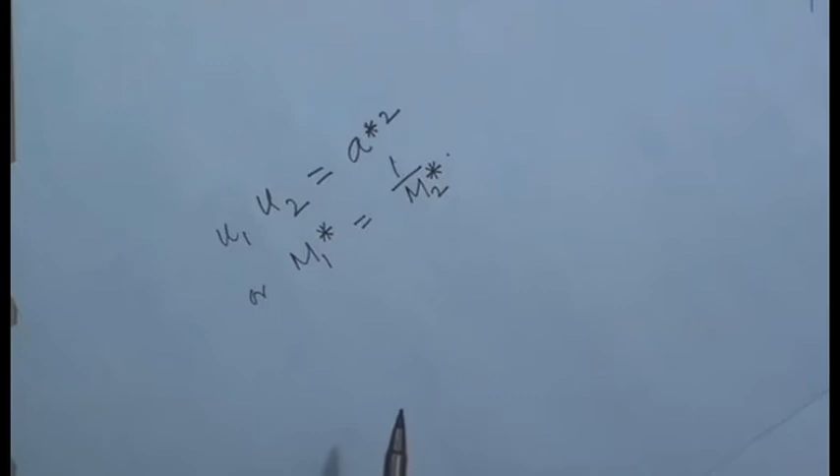So, continuing our discussion on flow through a uniform duct, we have seen that the flow velocity at the two stations 1 and 2 satisfies the relationship u1 u2 = a star square, which can be written as M1 star equal to 1 by M2 star. The speed ratio at the two stations satisfies this reciprocal relationship, which clearly shows that if M1 star is greater than 1, then M2 star will be less than 1, and if M1 star is less than 1, M2 star will be greater than 1, and vice versa.

We have already seen that M1 star becomes less than 1 when the flow is subsonic, that is when M1 is less than 1. So, what we can see from here is that when the flow is subsonic at station 1, the flow is likely to be supersonic at station 2, and similarly, if the flow is supersonic at station 1, it will be subsonic at station 2. However, there is nothing in this relation that excludes one of these possibilities.

However, as we have mentioned, based on physical grounds, if there is some sort of non-equilibrium region between station 1 and station 2, where viscous effects or heat transfer are present, then through these dissipative processes, accelerating flow is physically not possible, and the jump from subsonic to supersonic most probably will not occur in a real flow. We will later show using the second law of thermodynamics that the deceleration from supersonic to subsonic flow is physically possible. However, the alternative subsonic to supersonic acceleration through this jump will not be possible.

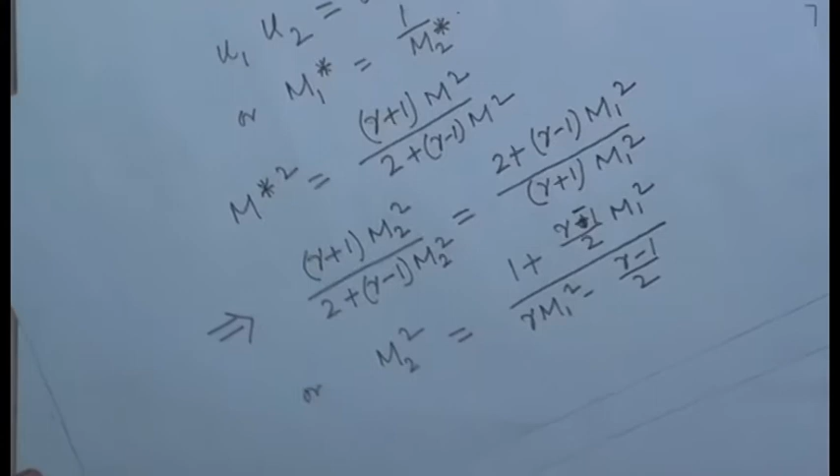Which can be written in the form M2 square equals 1 plus gamma minus 1 by 2 M1 square by gamma M1 square minus gamma minus 1 by 2. That is, the Mach number at station 2 is simply a function of the Mach number at station 1 and, of course, the properties of the gas. That is, we can write that M2 is simply a function of Mach number and gamma. You can see here that if M1 is 1, then M2 is also 1.

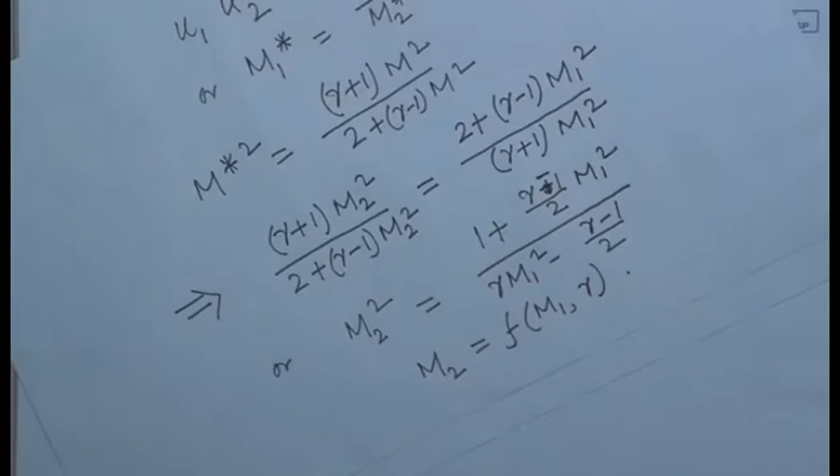However, if M1 is greater than 1, this shows, if M1 equals 1, then M2 is also 1. If M1 is greater than 1, then M2 is less than 1, and similarly, if M1 is less than 1, M2 is greater than 1, which of course we will see later on will not be possible.

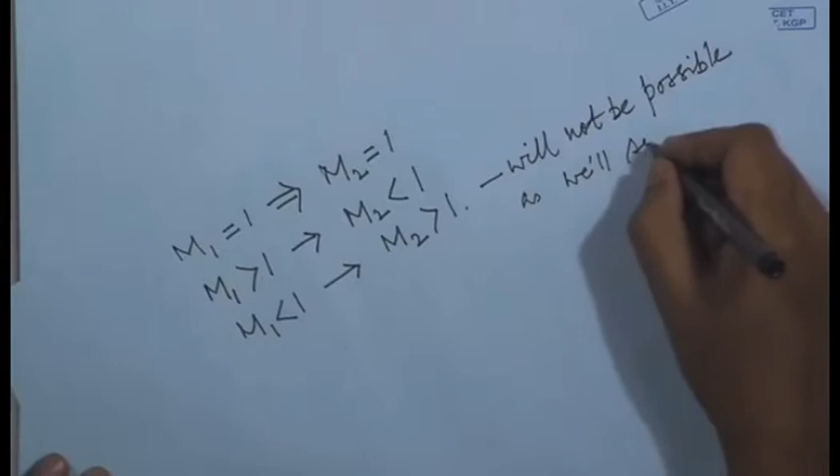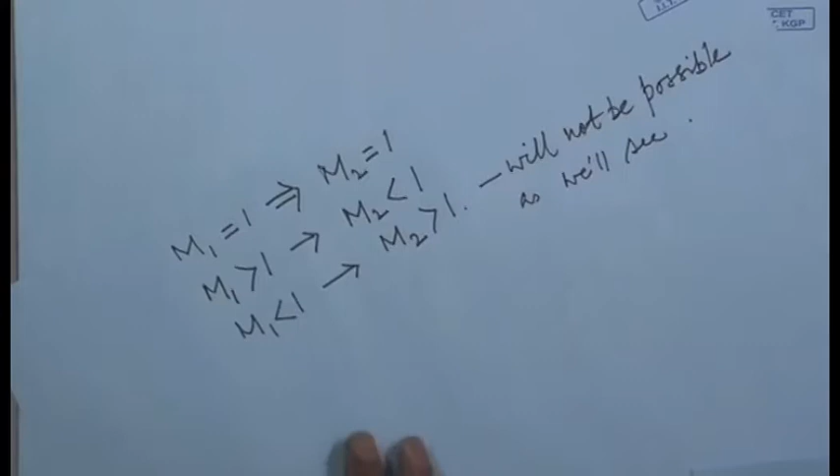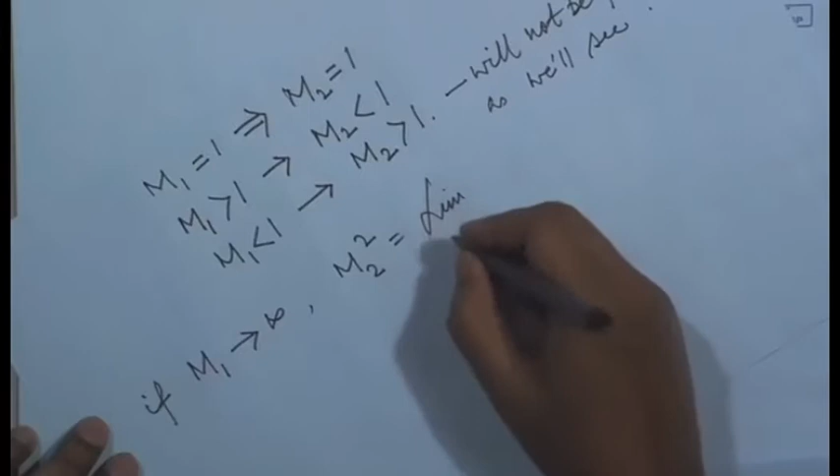Further, we see that as M1 approaches infinity, a very large value, then M2 square approaches gamma minus 1 by 2 gamma, and thus M2 reaches 0.378 if gamma is 1.4.

The velocity ratio between station 1 and station 2 can also similarly be obtained as u1 by u2 equals u1 square by u1 u2, that is u1 square by a star square.

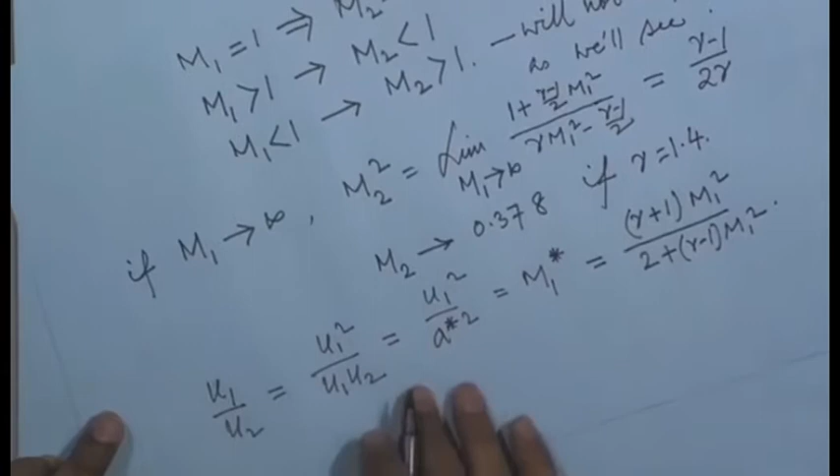Using the continuity equation for the present problem, we can also see that rho 2 by rho 1 is u1 by u2, and again can be written as gamma plus 1 M1 square by 2 plus gamma minus 1 M1 square.

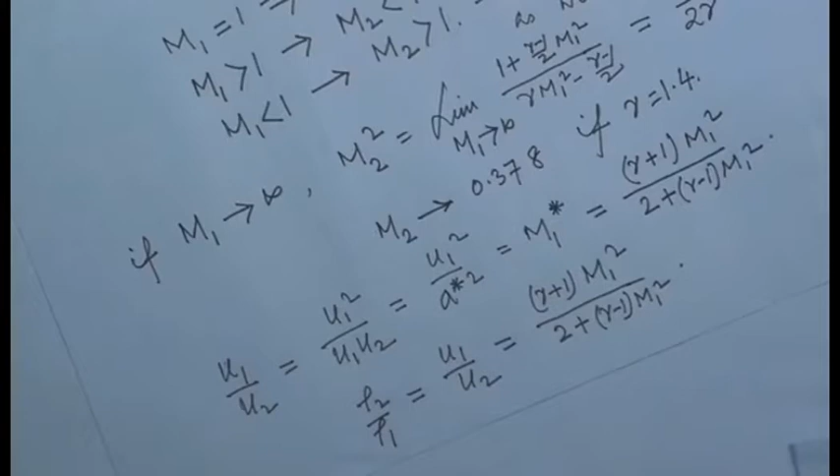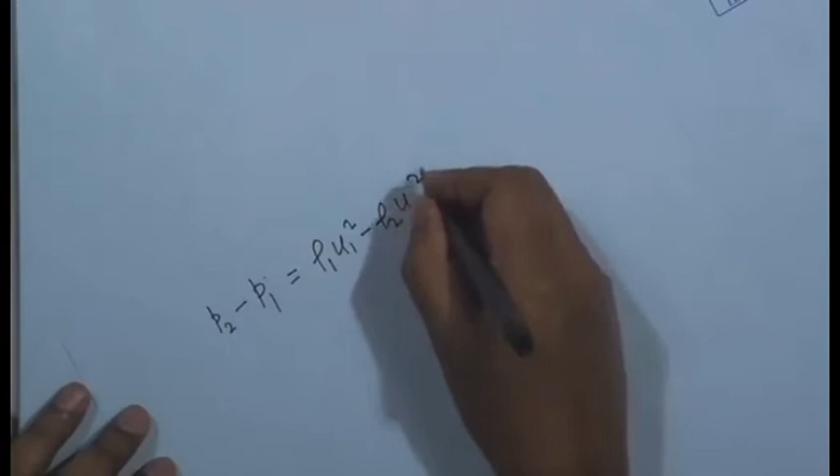The pressure difference between these two stations can be obtained from the momentum equation written in the form P2 minus P1 equal to rho 1 u1 square minus rho 2 u2 square, which can be written as rho 1 u1 into u1 minus u2, where rho 2 u2 is equal to rho 1 u1. That is, since rho 2 u2 square is rho 2 u2 into u2, which is rho 1 u1 u2.

Hence, we get the pressure rise P2 minus P1 by P1 as rho 1 u1 square by P1 into 1 minus u2 by u1. Then, using the isentropic relation for P1 by rho 1, we can write this to be 2 gamma by gamma plus 1.

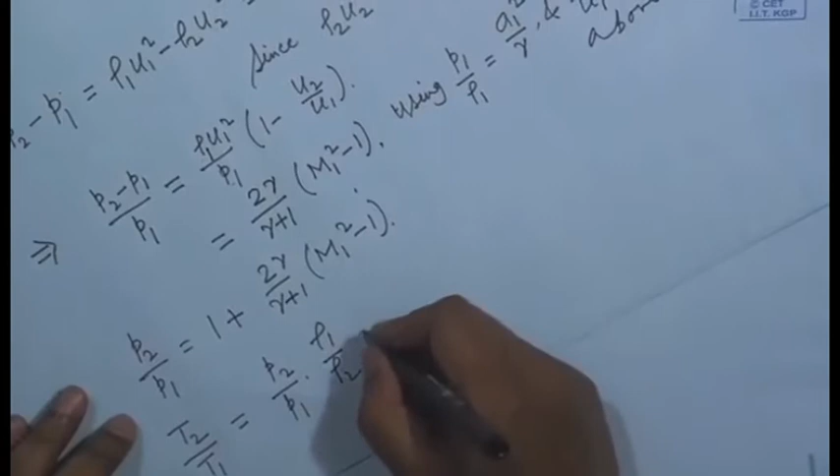The ratio delta P, or P2 minus P1 by P1, is often referred to as the shock strength. The temperature ratio can be obtained using the perfect gas relationship P equal to rho R T, that is P2 by P1 into rho1 by rho2, and this gives P2 by P1 is 1 plus 2 gamma by gamma plus 1 into M1 square minus 1, into rho1 by rho2,

where rho1 by rho2 is 2 plus gamma minus 1 M1 square by gamma plus 1 M1 square, which can be written as 1 plus 2 into gamma minus 1 by gamma plus 1 square, into gamma M1 square plus 1 by M1 square, into M1 square minus 1.

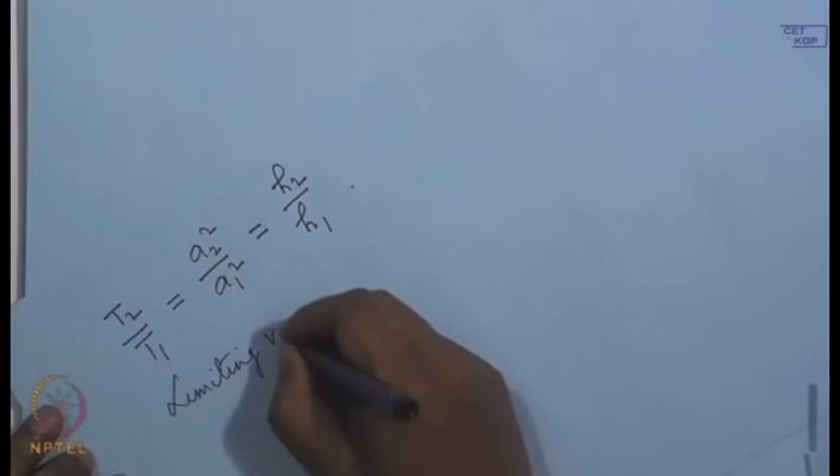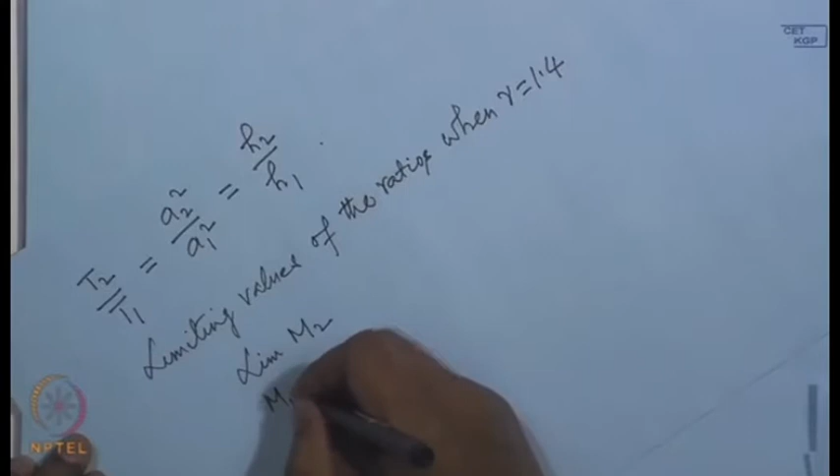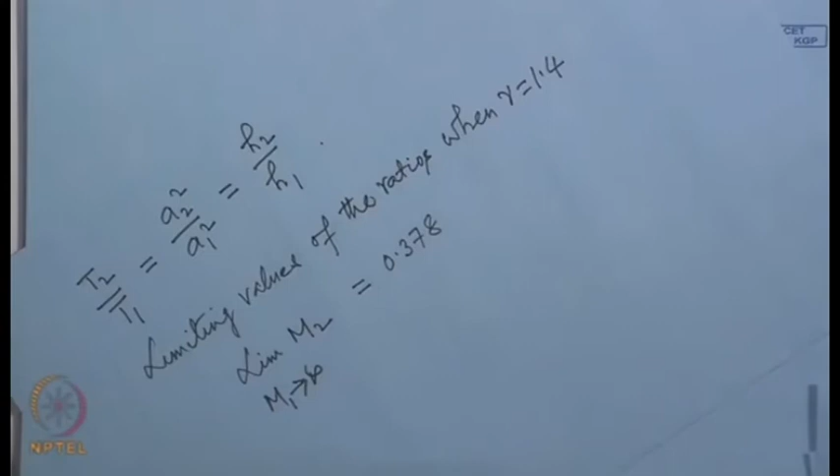Limiting values of the ratios when gamma is a fixed quantity given by 1.4, as is usually used for air. We have already seen that M2 as M1 approaches infinity is 0.378, and the density ratio becomes

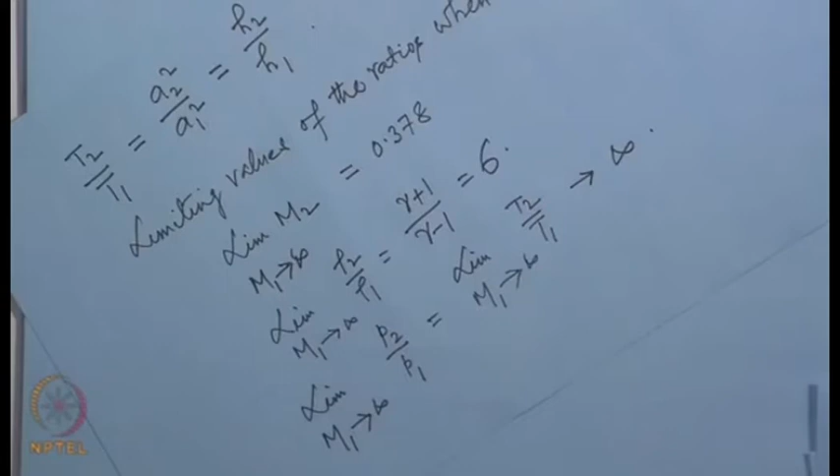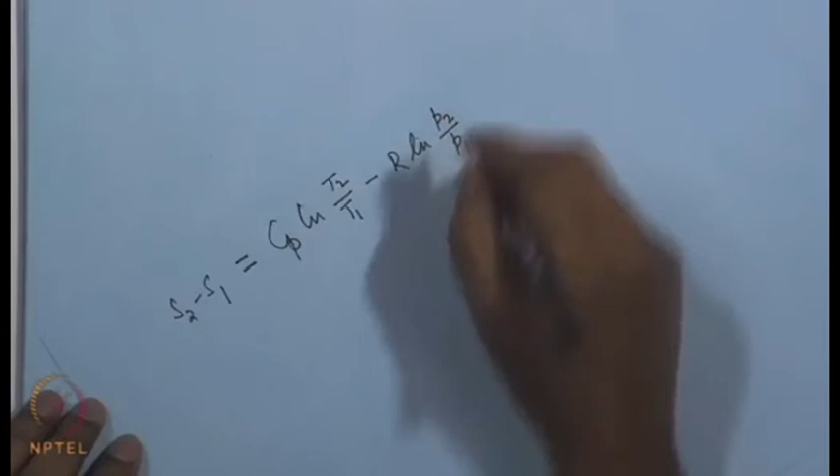Now, computing the change in entropy between the two stations, you can write S2 minus S1 is Cp log T2 by T1 minus R log P2 by P1, which can be written as R log, and substituting this pressure ratio and density ratio in this relation, we have S2 minus S1 by R equal to log, 2 gamma by gamma plus 1 M1 square minus 1

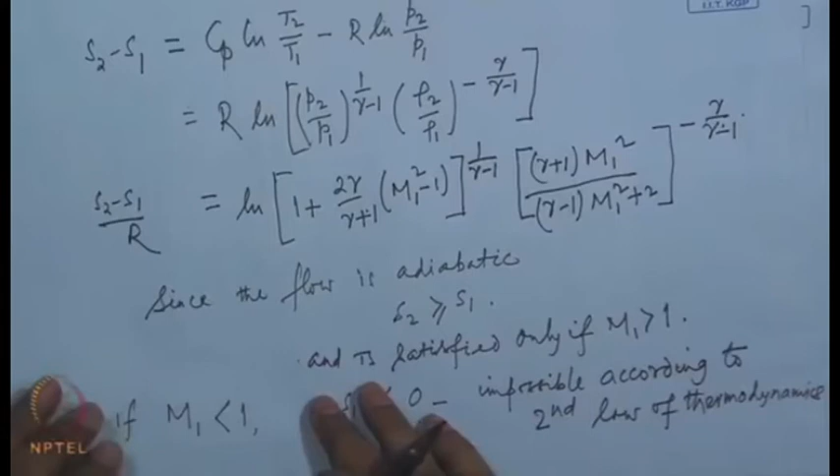A shock is called weak when the pressure rise across the shock is very small, and looking at the pressure ratio relationship, we can see that happens when M square minus 1 is small. That is, a shock is weak

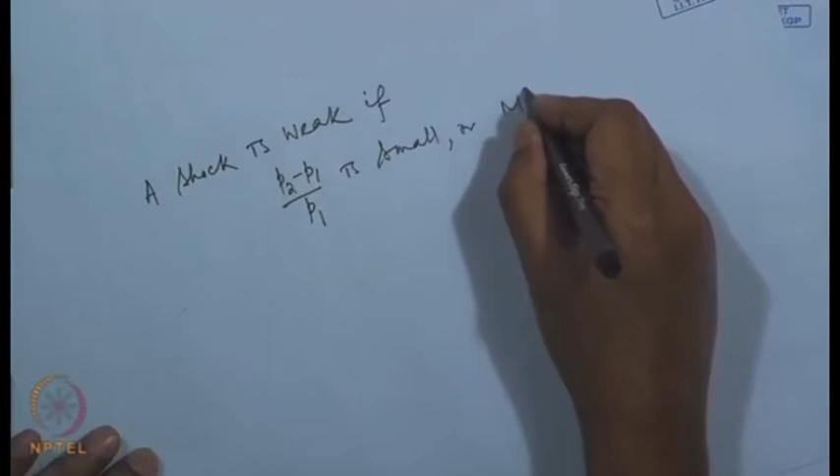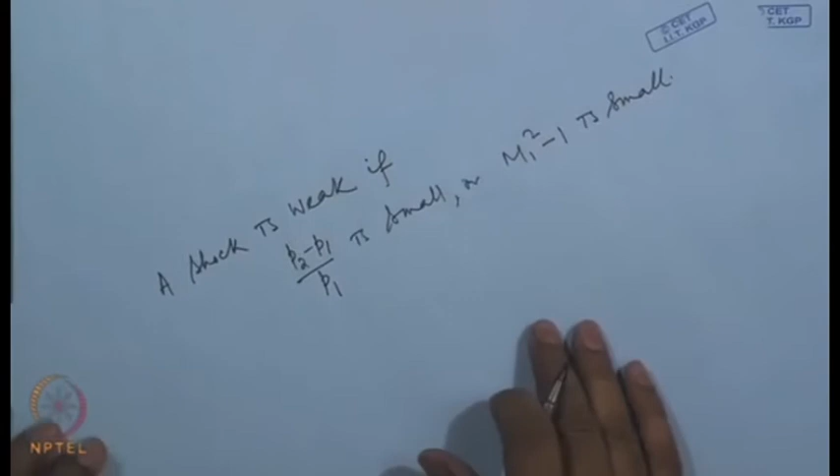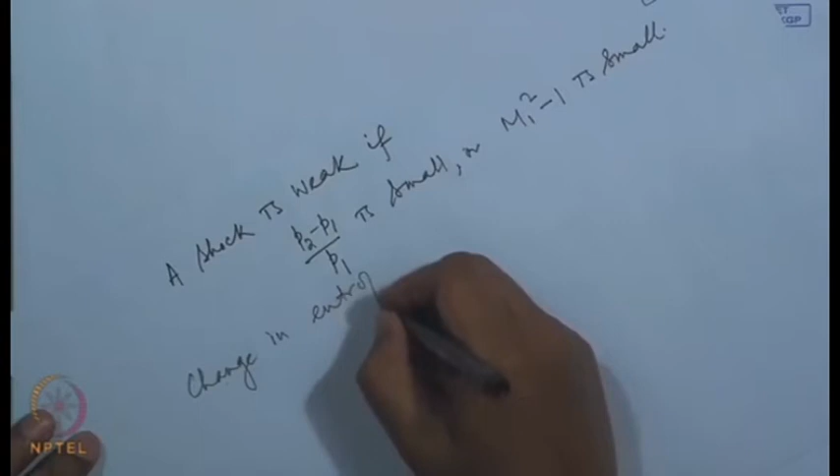and when this shock is weak, that is when M1 square minus 1 is small, the change in entropy can then be approximated, or in terms of pressure ratio, gamma plus 1 by 12 gamma square.

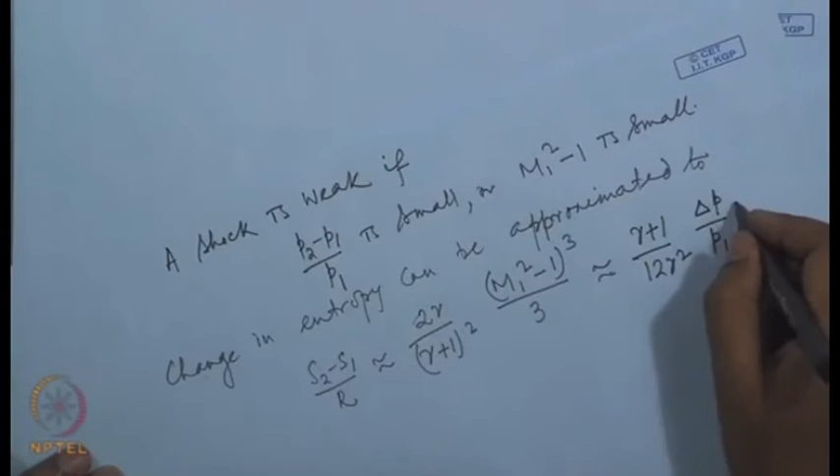So we see that for a weak shock the change in entropy is third order in shock strength. In the limit of a very weak shock, the change in entropy is almost negligible and the process is nearly isentropic. Since the flow across the shock is adiabatic, we have T02 equal to T01 as the flow is adiabatic.

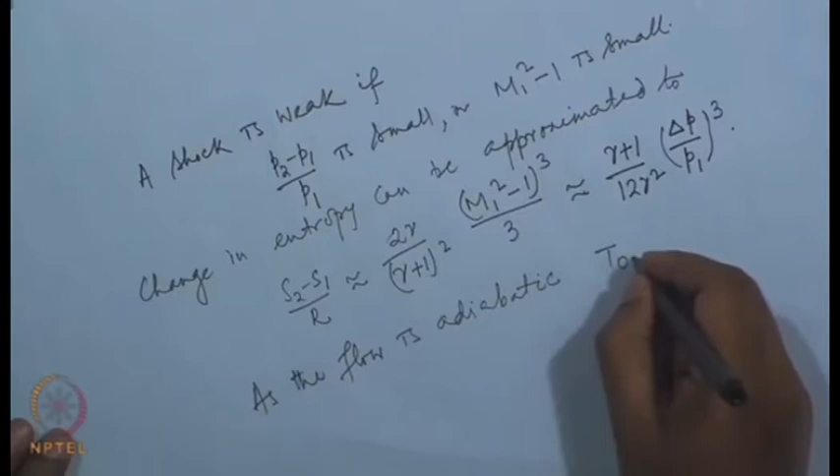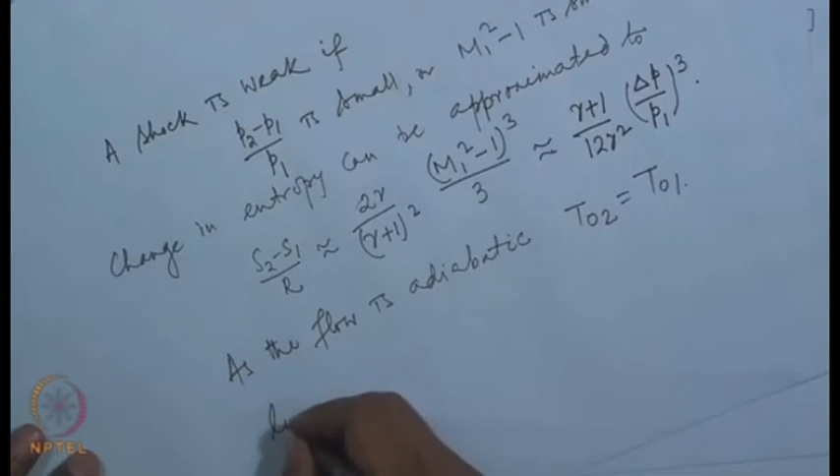T02 is T01, and the stagnation pressure ratio can be obtained in terms of the entropy difference

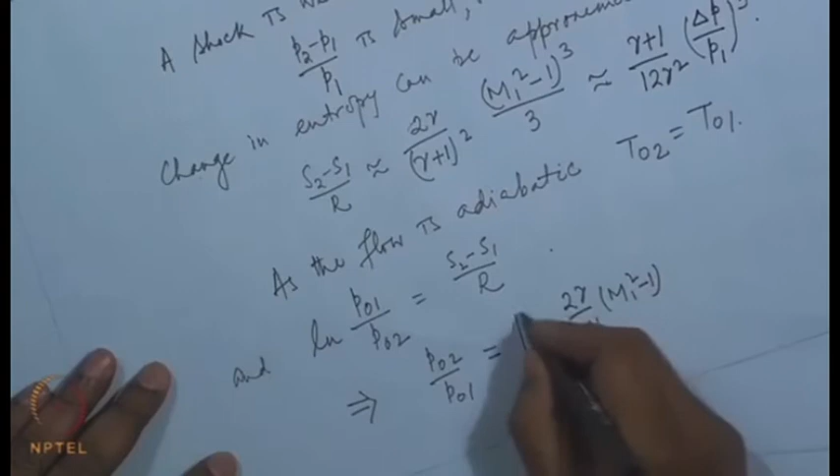and can be written as P02 by P01 equal to 1 plus 2 gamma by gamma plus 1 M1 square minus 1 to the power 1 by gamma minus 1, into gamma plus 1 M1 square by gamma minus 1 M1 square plus 2

Since change in entropy is directly related to change in total pressure, the change in total pressure is also of third order in shock strength.

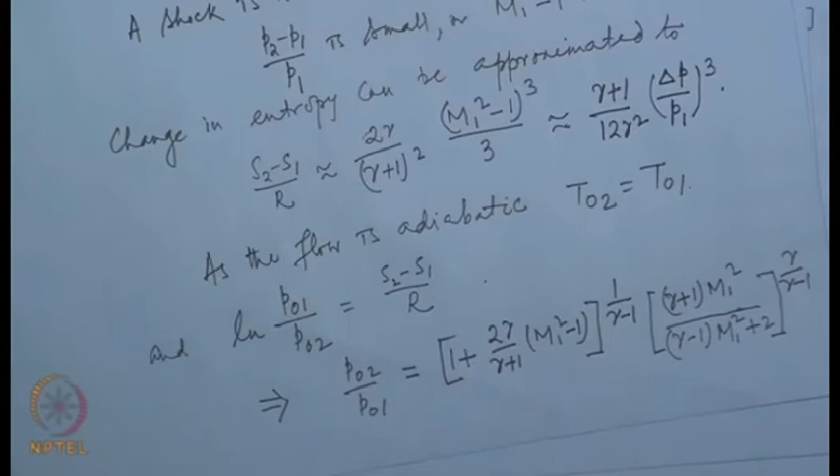Here these shock strength or shock jump relations we have expressed in terms of upstream Mach number. However, often they are expressed in terms of other parameters, particularly in terms of pressure jump instead of Mach numbers, and in general the shock jump relations are known as Rankine-Hugoniot relationships.

So, considering the flow through a uniform duct, we have seen that for a compressible flow through a uniform duct, if we have a supersonic flow at station 1, then we can have a subsonic flow at station 2. And since we have used integral relationships at station 1 and station 2, any non-equilibrium region is possible between them. The only requirement is that flow at station 1 and station 2 must be in equilibrium, and a non-equilibrium region may exist between station 1 and station 2.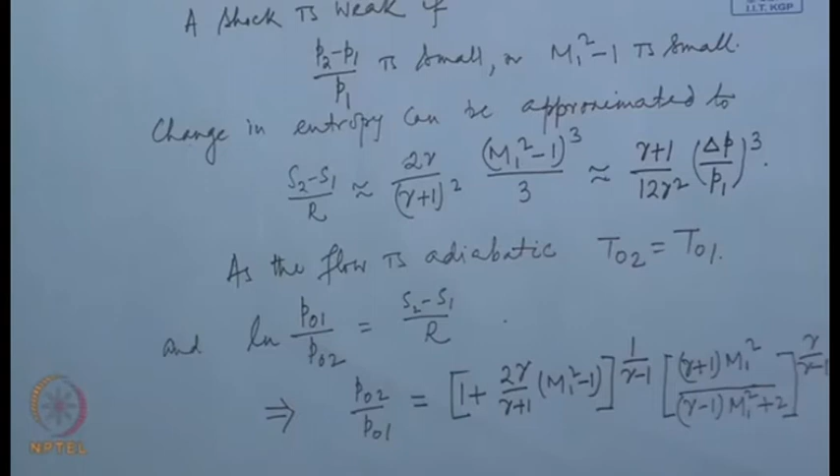Since station 1 and station 2 and the region between them has no restriction in size, that is the non-equilibrium region can be of infinitely thin extent, we can consider that station 1 and station 2 may be just the two sides of one thin line, and in that case that thin line is called the shock wave.

As we have mentioned earlier, in real flow this shock thickness cannot be 0; there will be a finite thickness even though very small, and within that region there will be very large and rapid changes of the flow parameters, velocity and temperature, pressure and density. And these rapid changes in velocity gradient and temperature gradient give rise to dissipative forces, which cause an increase in entropy across the shock.

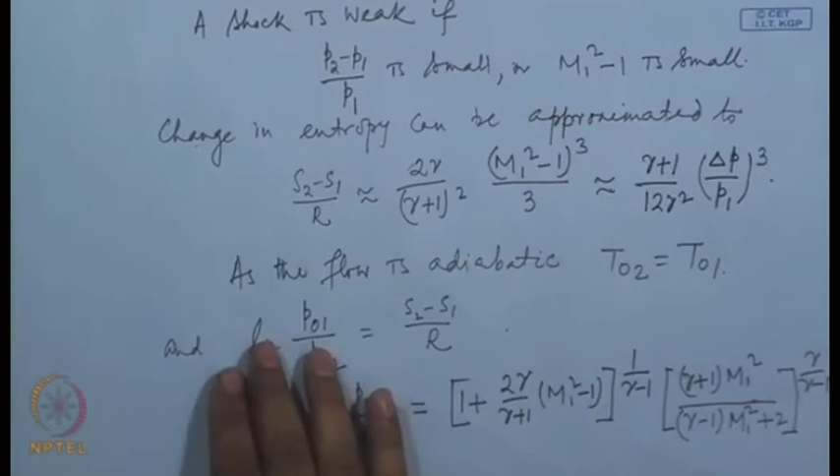Since we have considered one dimensional flow and the shock is standing across it, that is a normal shock, and in one dimensional flow that is the only possibility of a shock wave, a normal shock. And these normal shock relations that we have derived here assume that the shock is stationary and the fluid is flowing through it with a speed u1 upstream and u2 downstream.

However, in many practical problems, the shock is found to be propagating through the fluid. As you can think, when an aircraft moves, the shock system of the aircraft or the wing also moves with it, and in that case the problem becomes a moving shock, and we would like to revisit this shock relationship for a moving shock, that is, when the shock is propagating through the fluid with a speed us. So let us consider now a moving shock wave problem.

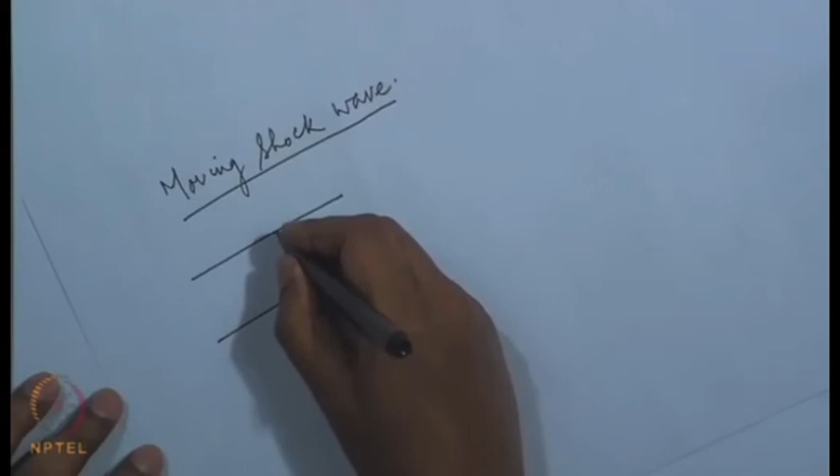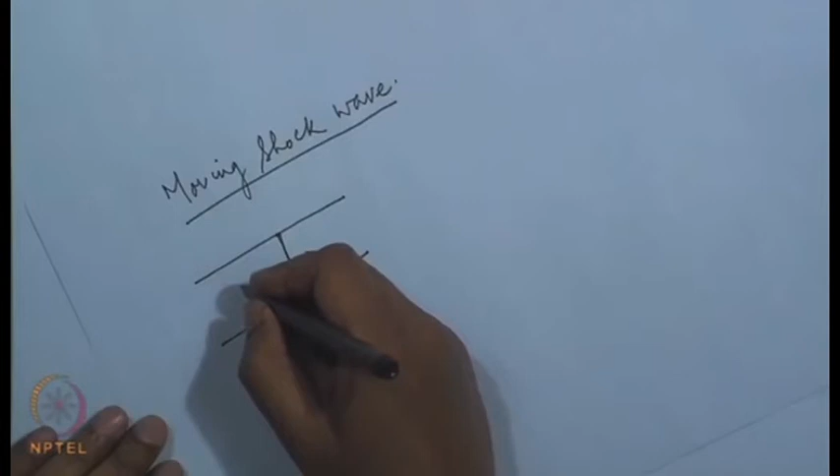Let us say we have a duct and we have the shock moving with speed us. And as the shock moves with the speed us, the fluid behind it, that is the fluid in this region, is also being dragged with it, and let us say that the fluid behind it is moving at a speed ub, and the fluid in front of it is stationary, that is the shock is moving through a stationary fluid.

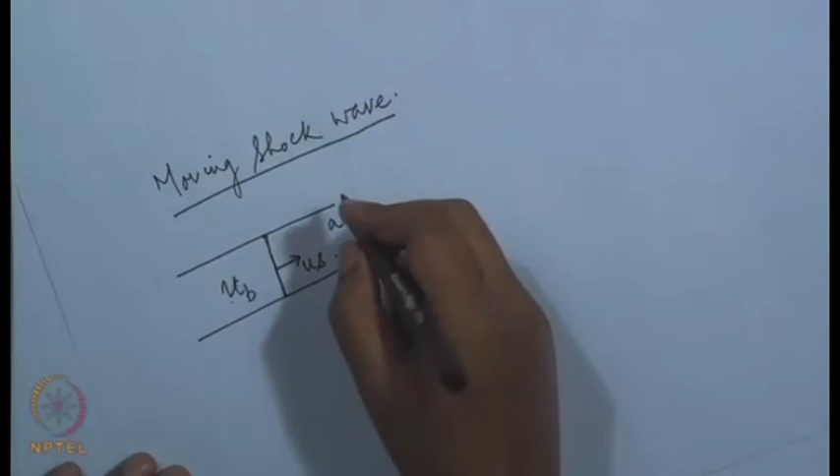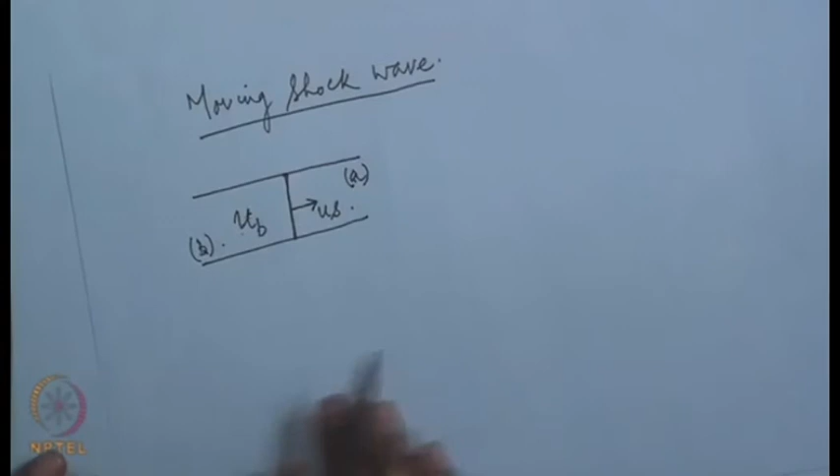And we would like to see in this case the relationship of the flow parameters or fluid properties in station A and station B. Now, what we did earlier is that we satisfied the conservation laws, namely continuity, momentum and energy equations, between the two regions, one ahead and one behind the shock wave. Now, we see that we cannot do that in this problem. We cannot satisfy the continuity equation between region A and region B, simply because the fluid in region A is not part of the fluid that is flowing through region B. It is always separated by this shock.

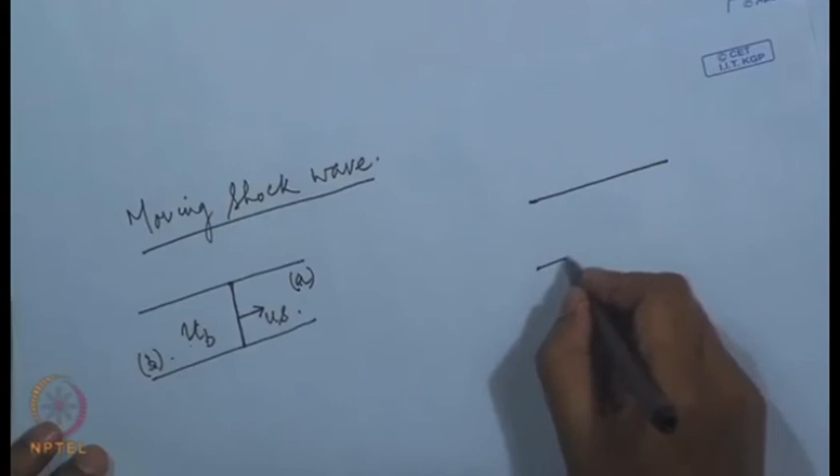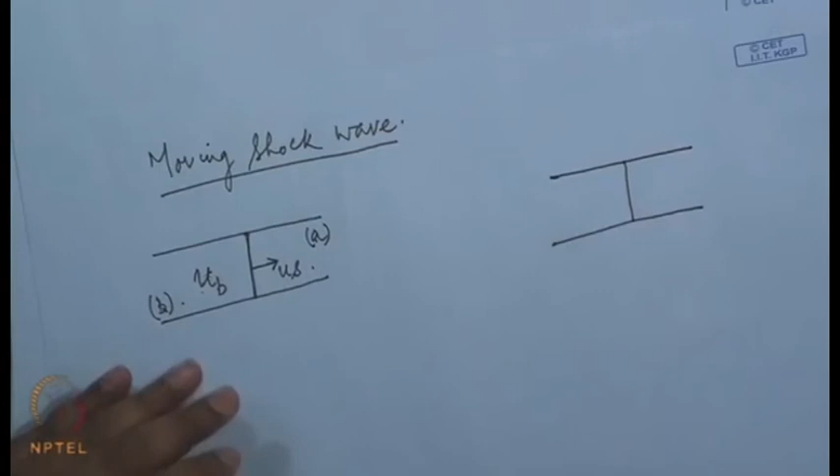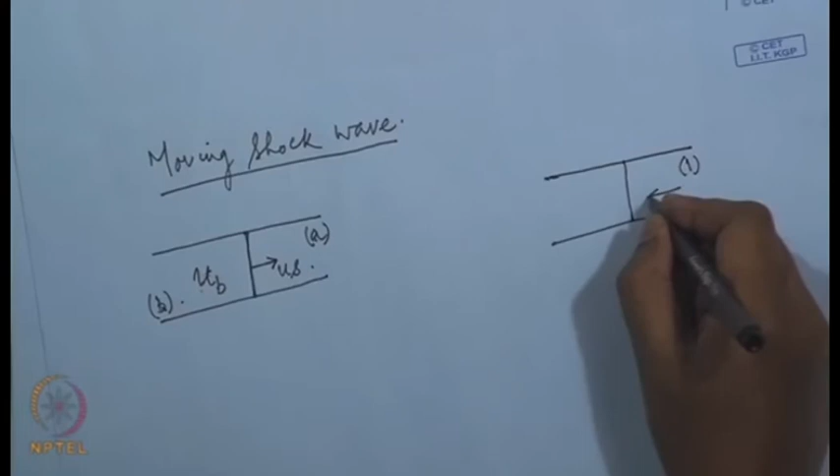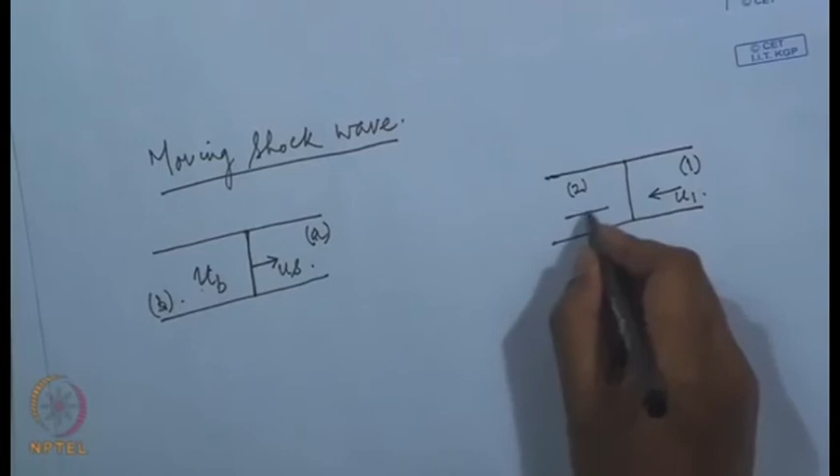However, what we can do in this case is consider a change in reference system in which we consider an observer who is moving with the shock wave. Then with respect to this observer, the fluid in region A, which we will now designate as region 1, is moving with the speed u1 in this direction, and fluid in region 2, that is B, is moving at a speed u2.

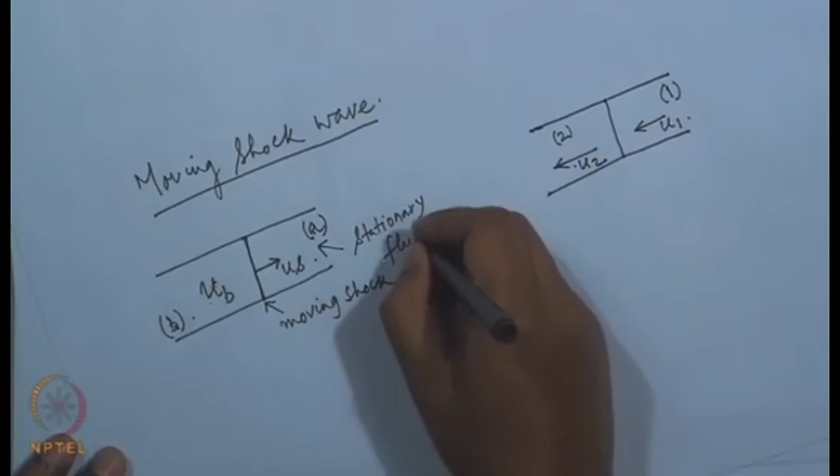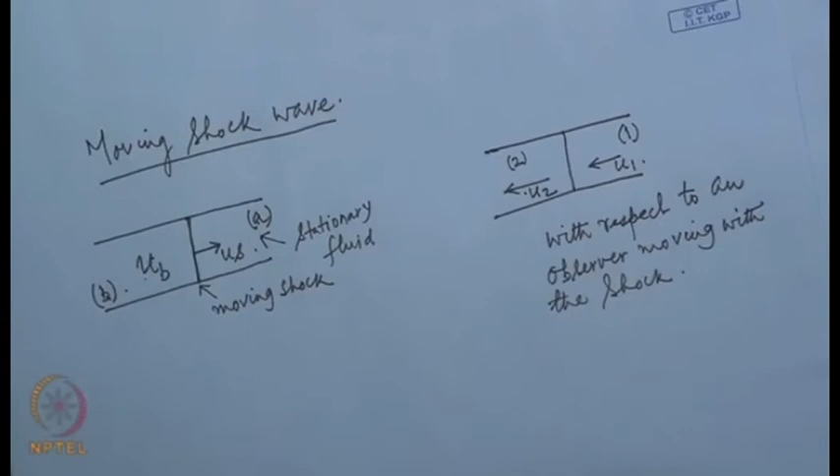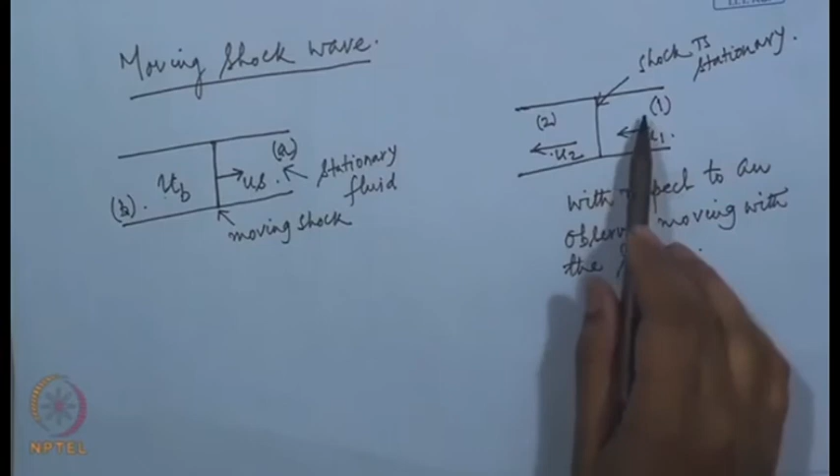This is with respect to an observer moving with the shock, and the shock is stationary. Now, in this configuration, of course, we can satisfy the conservation laws between a station in region 1 and region 2, because now the fluid in region 1 and region 2 are part of the same flow.

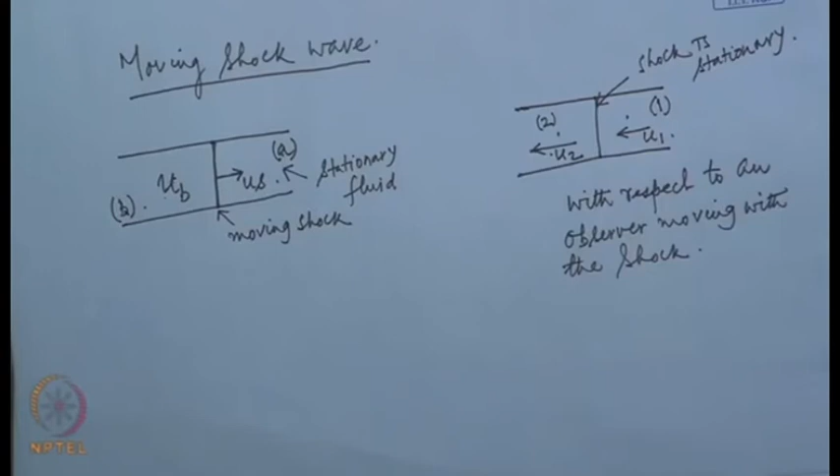Now, what we find here is that u1 equals us, and u2 equals us minus ub, which is u1 minus ub.

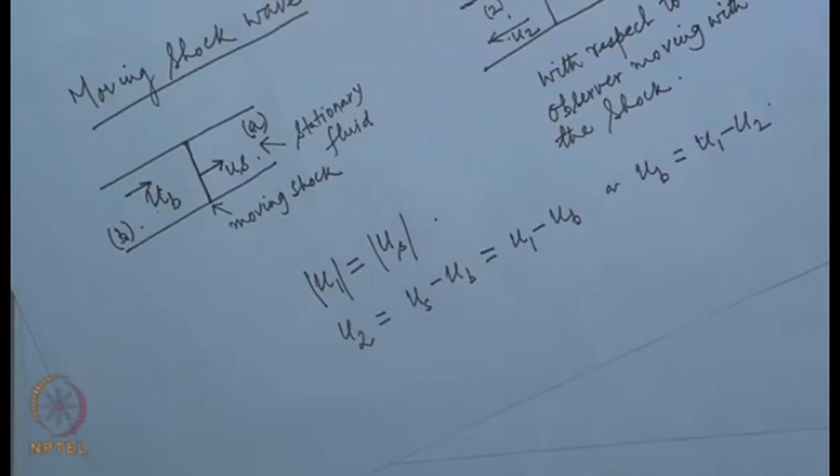Now, the static densities, pressures and temperatures on either side of the shock are of course not affected by this transformation. The shock jump relations for these quantities, density, pressure and temperature, remain the same as we have obtained earlier. The jump relations in this case may be written in terms of the shock speed and the speed of the fluid behind the shock, using the transformation. The shock Mach number we can define as

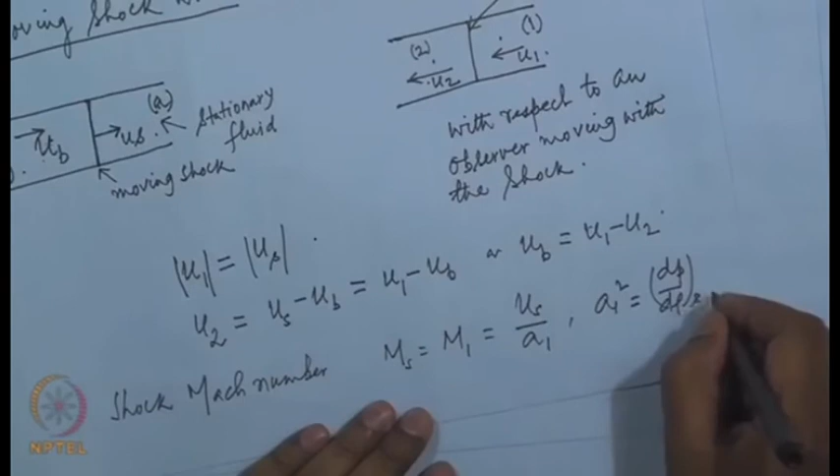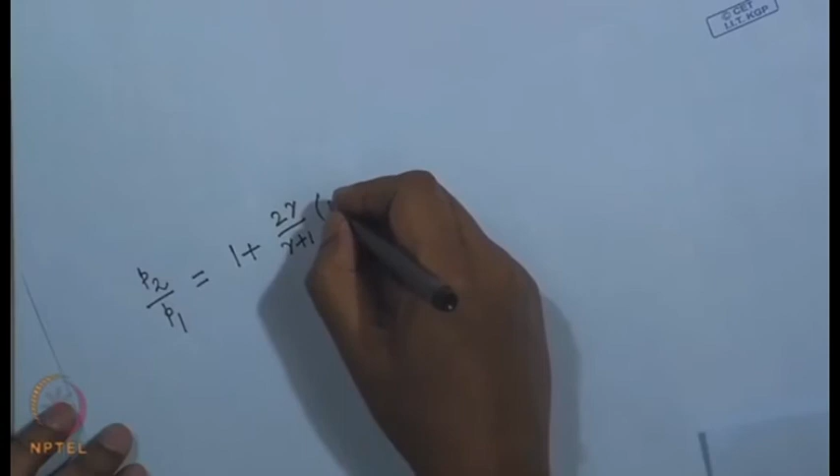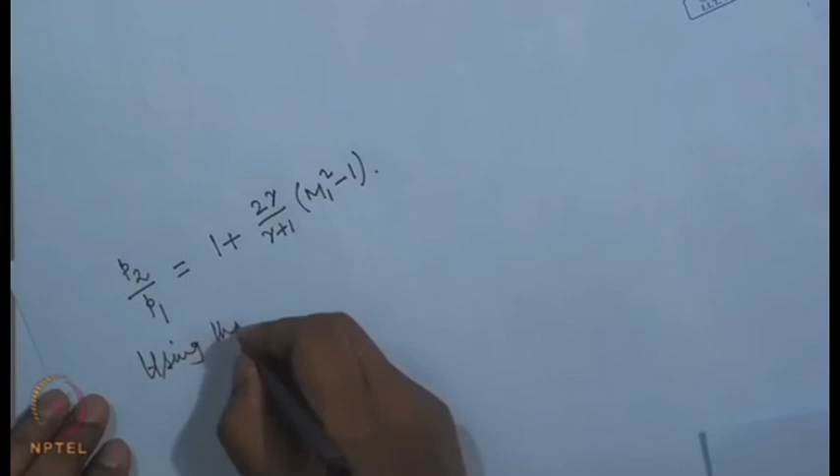Now, using the pressure ratio P2 by P1 as 1 plus 2 gamma by gamma plus 1 times M1 square minus 1, we can obtain the shock velocity in a perfect gas.

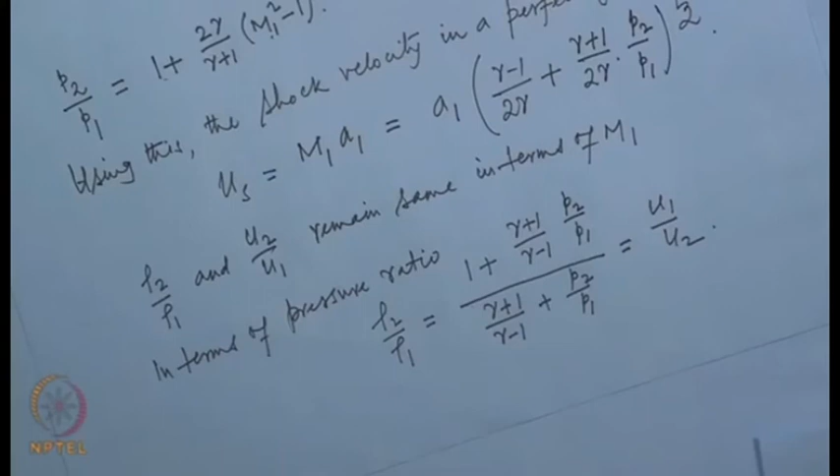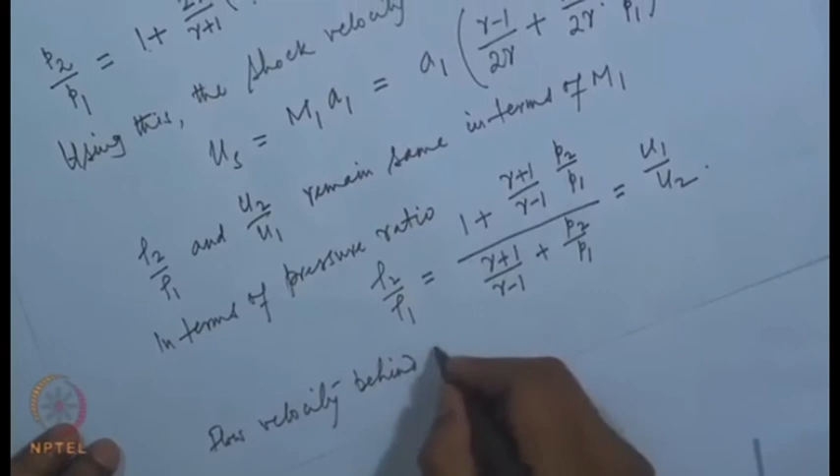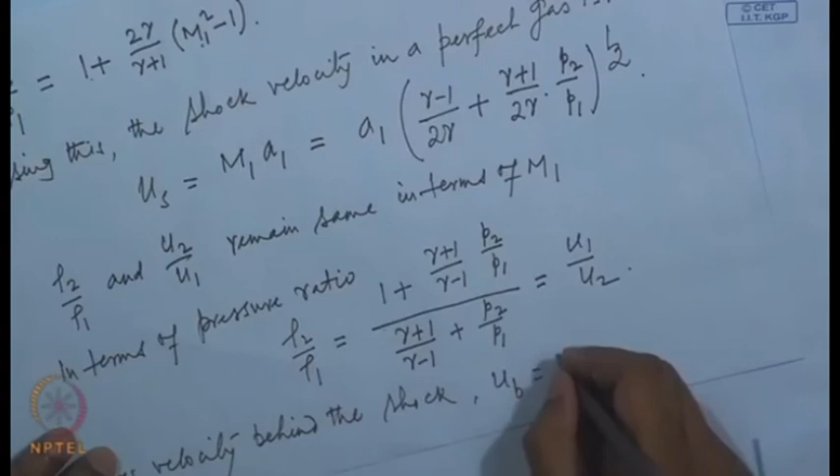Similarly, we can write the ratio of the temperature. The flow velocity behind the shock, that is u b, can be written as u 1 minus u 2, which can be written as u s into 1 minus u 2 by u 1, and in terms of the pressure ratio, this becomes a 1 by gamma.

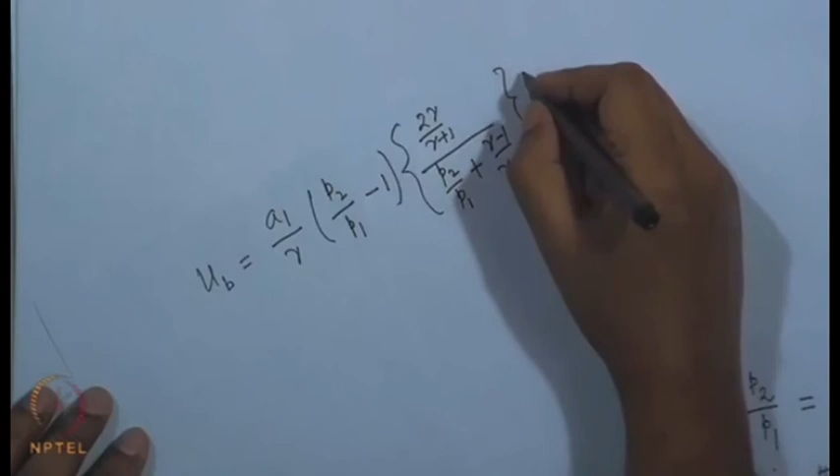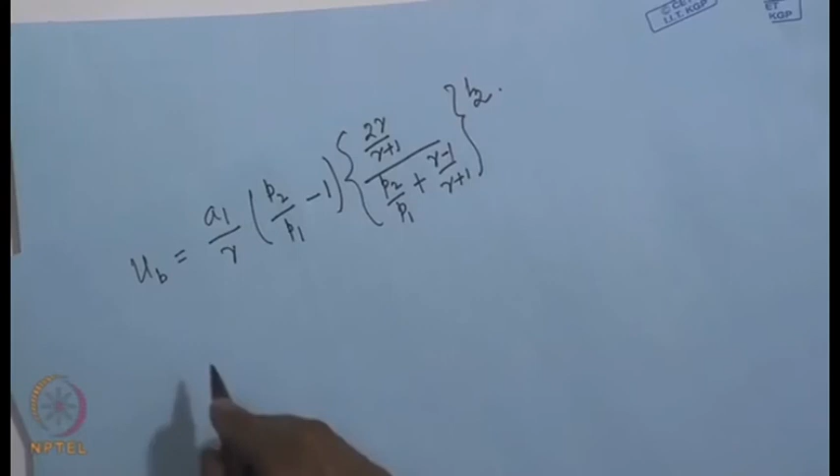These static quantities, as we have mentioned, are the same for both systems. However, when you come to the total quantities, they are not the same in the two systems. It should be noted, coming back to that configuration 1 and A and B and 1 and 2, that the total quantities at region A are the same as the static quantities at region A, because the fluid there is stationary, that is H 0 A is the same as H A. However, this is not the same as H 0 1.

H 0 B, that is the stagnation enthalpy in region B, is simply the static enthalpy at region B plus the kinetic energy of the fluid in region B, that is half u b square. However, this is not the same as H 0 2, total enthalpy at 2, and also the total enthalpy in region B is not the same as the total enthalpy at region A.

However, the total enthalpy in region 2, which is simply H 2 plus half u 2 square, is equal to H 1 plus half u 1 square, equal to H 0 1. And using this relationship, the total quantities or the stagnation quantities can be found behind and across the shock.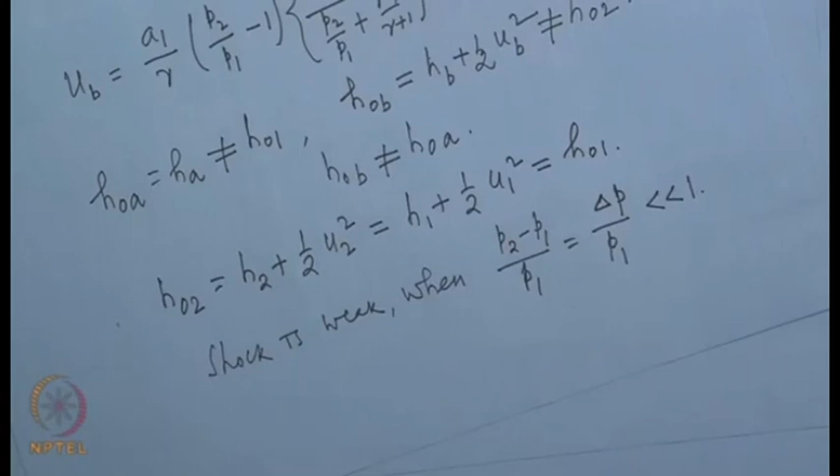A shock will be called a weak shock if the normalized pressure jump is very small. That is, a shock is weak when P 2 minus P 1 by P 1, that is the normalized shock jump, is very small. The disturbances are also then very small, and they can be obtained by expanding this relationship in series of delta p by p 1 and retaining only the first order terms, and this gives the density rise to be gamma minus 1 by gamma into delta p by p 1.

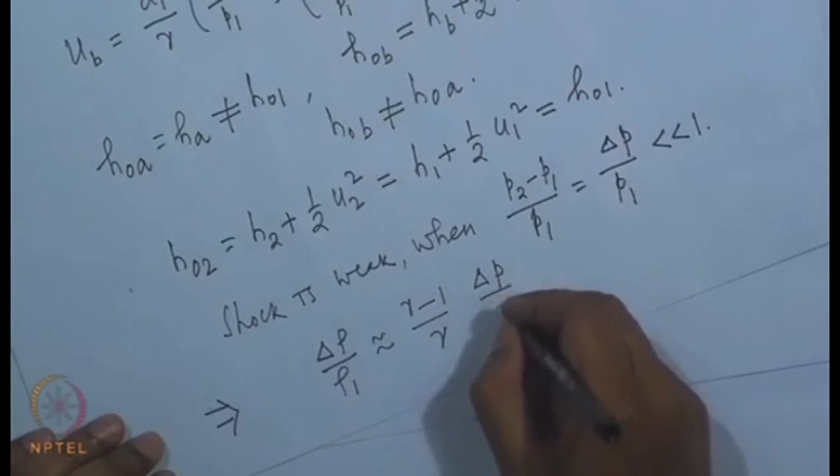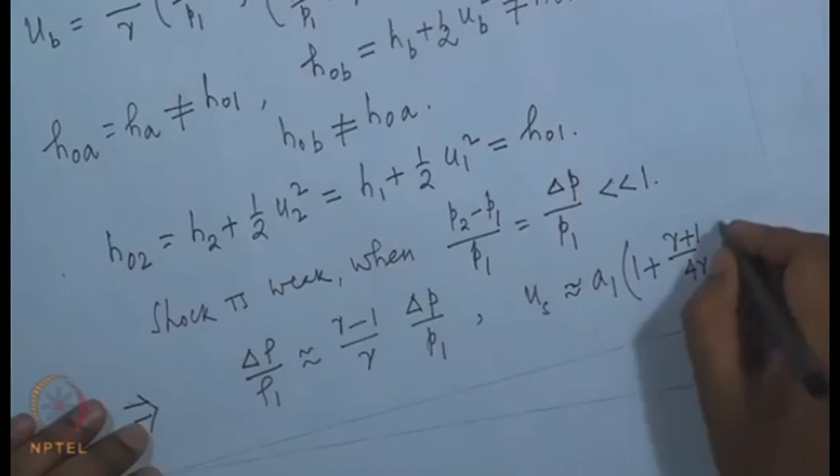The shock speed will be approximately A 1 into 1 plus gamma plus 1 by 4 gamma, that is, the speed of a very weak shock is very close to A 1.

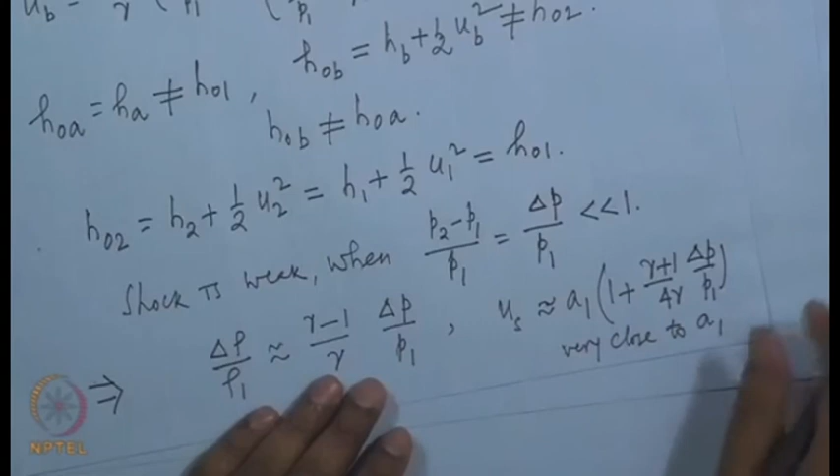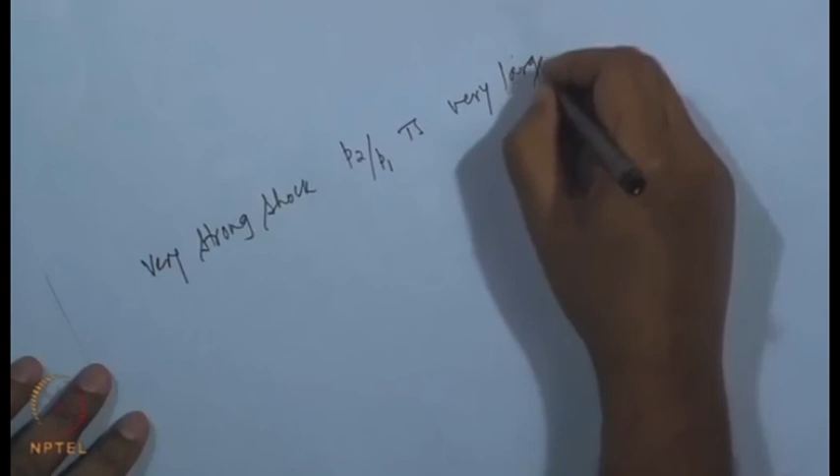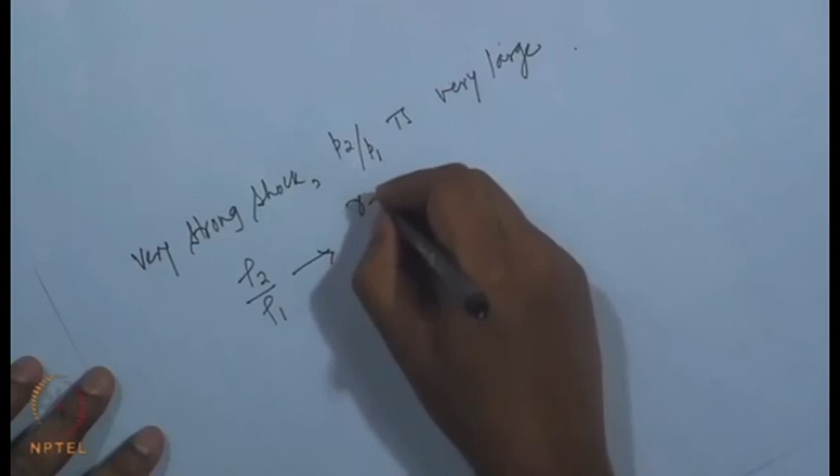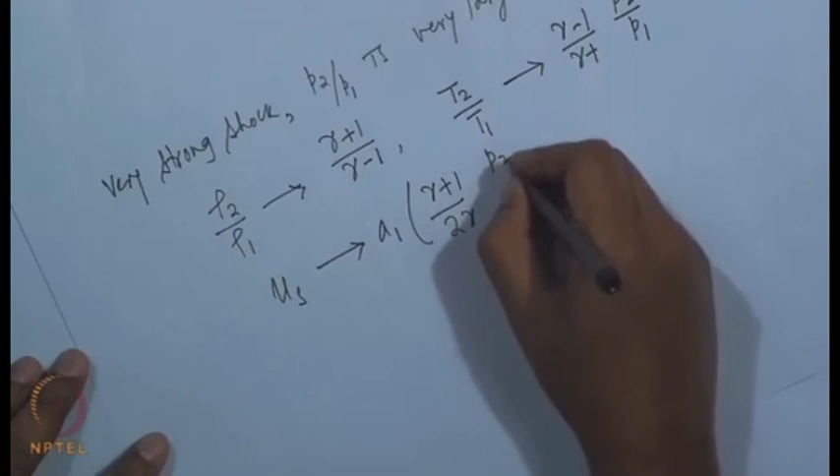For a very strong shock, P 2 by P 1 is very large. And in that case, rho 2 by rho 1 approaches, as before, gamma plus 1 by gamma minus 1, T 2 by T 1 approaches gamma minus 1 by gamma plus 1 into P 2 by P 1. The shock speed approaches A 1 into gamma plus 1 by 2 gamma into P 2 by P 1 to the power half, and u b, that is the flow velocity behind the shock, is A 1 into...

So, in our discussion of flow through a uniform duct or flow through a normal shock, we have seen that when a supersonic flow crosses a normal shock, its pressure increases by a jump, and in the limiting case of a perfect gas with gamma equal to 1.4, the pressure jump can approach a very high value. Similarly, the density also undergoes a jump, and the limiting value of the density jump can be 6 for a perfect gas with gamma equal to 1.4, which is usually chosen for air.

The downstream Mach number becomes subsonic, and across a very strong shock, the downstream Mach number approaches a limiting value. For air with gamma equal to 1.4, the value becomes 0.378. We have also seen that the second law of thermodynamics excludes the possibility of a jump from subsonic to supersonic condition, meaning that a shock cannot occur in a subsonic flow, and through a shock flow cannot accelerate. An accelerating shock is impossible as dictated by the second law of thermodynamics.